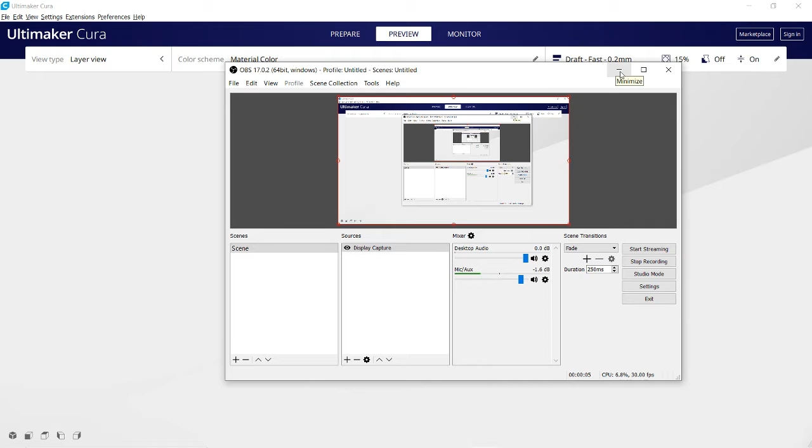So here I am, I've got Cura open. This is the most current version, you guys can get it installed. You've got to set up your printer when you install it. We need to configure it to the printers we're working with, and I'd like to do that on Friday's class so we can get the specs of the printer set up and match them to the printers we're working with. So let's save that for now, but let's start getting the actual print ready to go.

At this point, what I'm going to do is import the model I was working with. So I'll go File, New Project, then Open, and here we are. This is the truck hanger that we created, and I'm going to select it. This is coming from Maya. I go Open, and there it is.

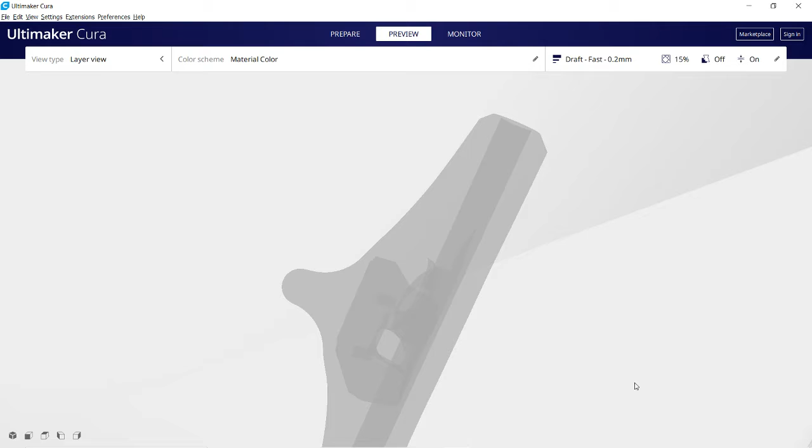I'm just using the middle mouse wheel. This is the workspace. Middle mouse wheeling, and I'm just rolling backwards, and as I roll backwards, I zoom out. Then I can use the right mouse button, clicking and dragging to orbit. So I was underneath it before. Here we are, there's the truck.

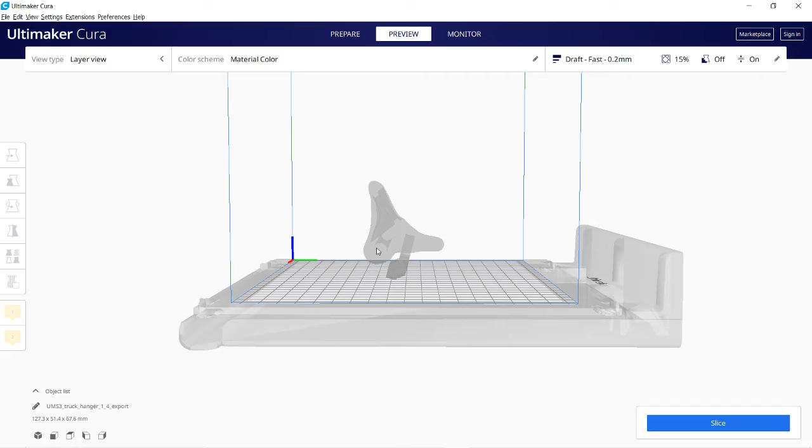Unfortunately, this is probably poor placement for the truck as is, because it's going to have to create a build from the support material going down to here, since it could never withstand this overhang. So we would want to reorient this. That's something we think about.

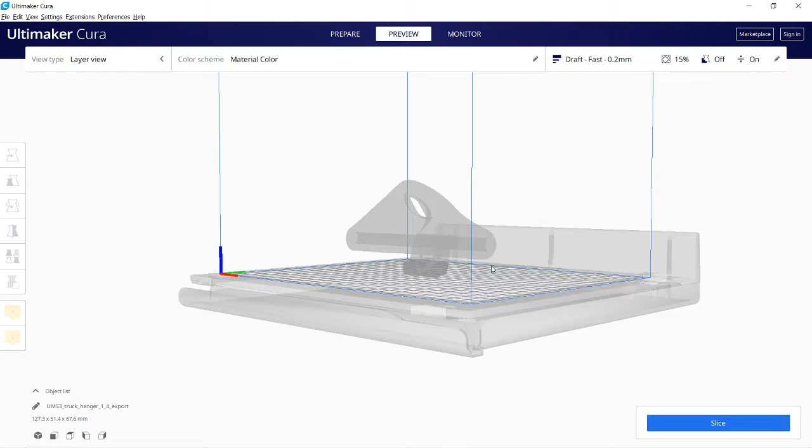And then the next thing, as I mentioned before, is which side needs to be pretty, which side is going to be facing our audience. I know this side is, but this is going to be a prototype, so this is not the final build. I'm going to do this at low resolution, and I think it's okay if this side has the support against it. I'll have to take a knife or a rasp, a little file, and clean this off, sort of like with an X-Acto knife.

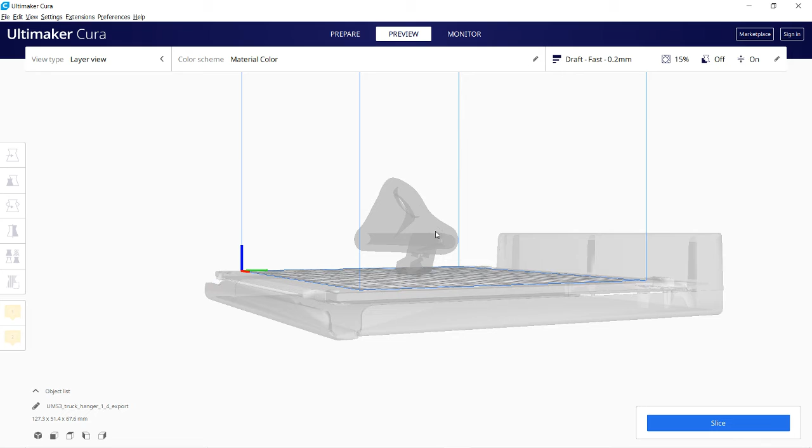Okay, so the first thing I'm going to do is reorient it. So we've opened this up, we're in the preview mode. I can click on Prepare. It works very much like the other programs we worked with.

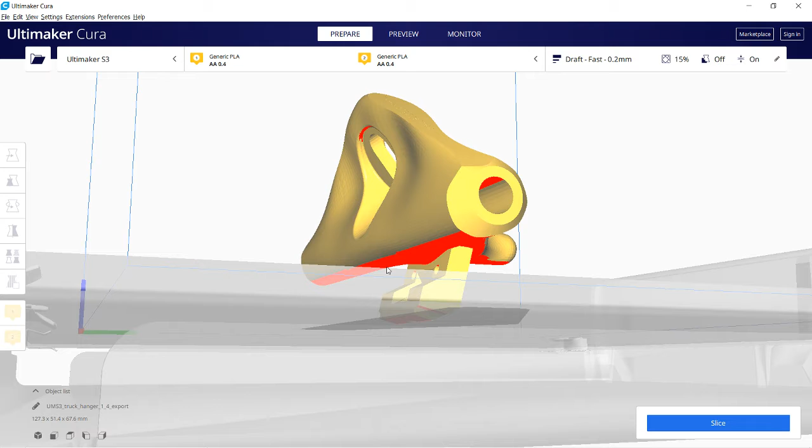What I need to do is have this selected. You can see I have all these little tools across the sidebar, but they're grayed out right now because I have nothing selected. When we get in here, though, we do see the red showing us the overhangs, that this is overhanging straight down to the ground and will need support. It could be supported, so we can choose whether or not to, but this stuff would definitely have to be.

So what I'm going to do is select it. I'm using the right mouse to move around. I'm going to left click directly on it, and as you see, the rotation handles come up. We can see if I go from the top, they have the move, which is T. They have a different hotkey system. This is S, and then this is R.

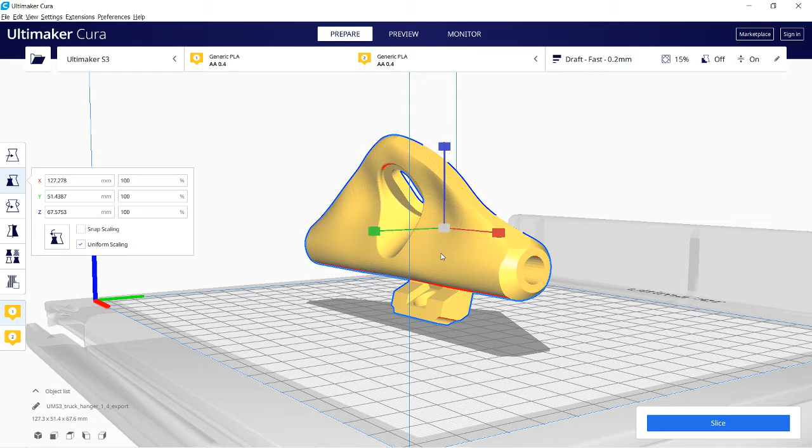T, S, R - T to move, S to scale. We don't want to scale this because I want to keep real world scale - it has to match up to my camera. And then here, this is going to be the rotation. So what I'm going to do is select rotation. I've got this here, and again, don't use the scale if you want to stay in real world.

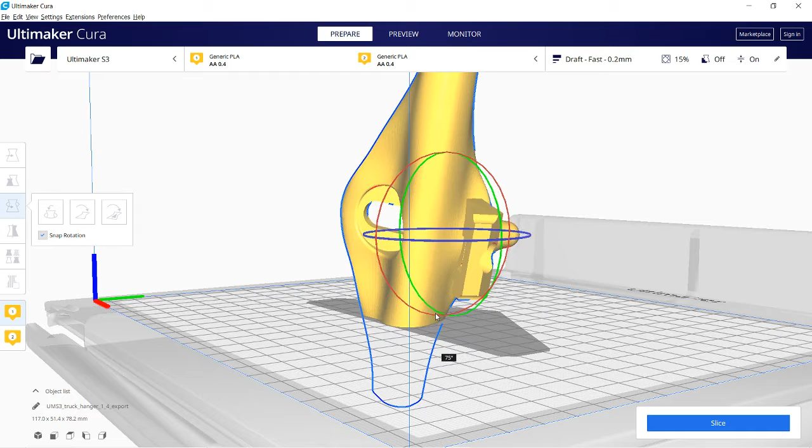And I'm dragging it, and you can see I'm totally failing, it's not working. And you can see as I'm moving, the red area showing the overhang is changing in real time. So what I'm going to do is just go Control Z to undo my move.

And what I can do is come over here, and we can see across the bottom we have these little view cubes. The first one is going to be an orthographic view in the front view. The second one is a top view. This should be a side view, and then the other side, so right and left.

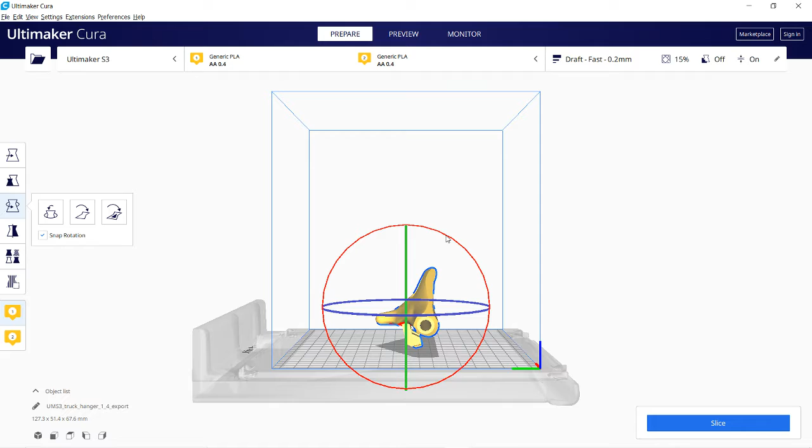I'm going to go into the front view, and I'll go into a side view like this. Here's our side view. I'm going to grab the red handles—I want to grab the handle, not from the center of rotation. I'm going to drag it like this, and try to get it into the position where it has the least amount of overhang, which I know to be this.

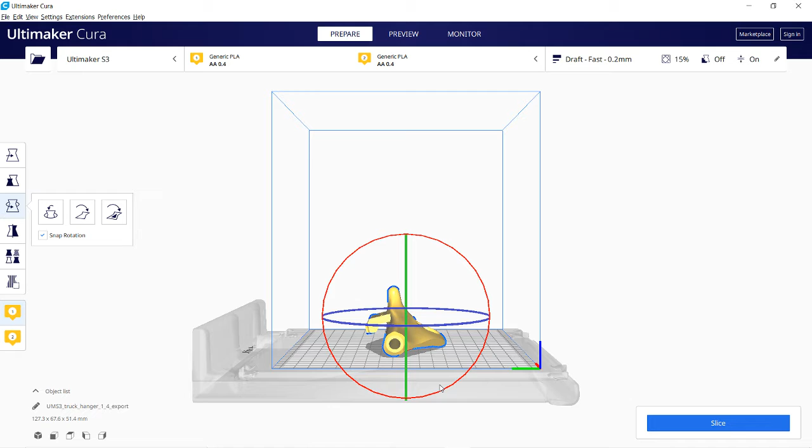The thing I like about this program is that it auto-configures it. It's automatically bringing it to the build plate so it's not going through the build plate, although I think I got it to go through once, and it was showing a failure.

With this done, I could just mouse around—this is something I would do in any 3D graphics program. Always rotate and look at it in the round, take a look. I'm going to zoom in here a little bit. Middle mouse click to pan, so I'm clicking and holding. I'm going to rotate around a little bit, zoom in, move around like this. This looks pretty good.

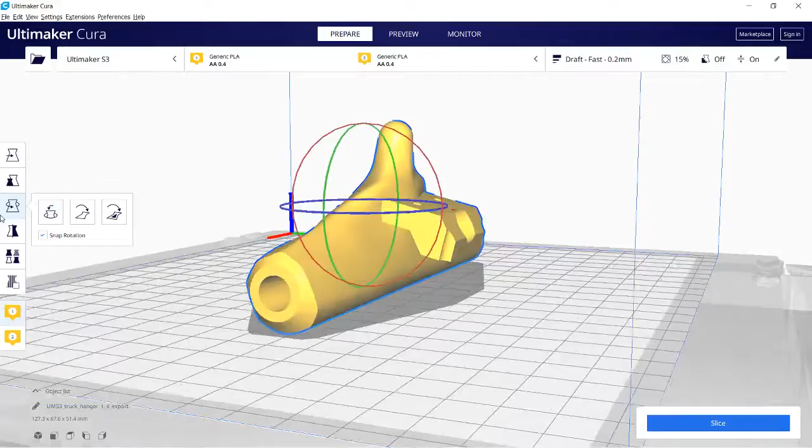At this point, what we're going to do is get the support set up and configure the build. For basic people, if you haven't done this before, the easiest way is to go with the basic settings, which are pre-configured here.

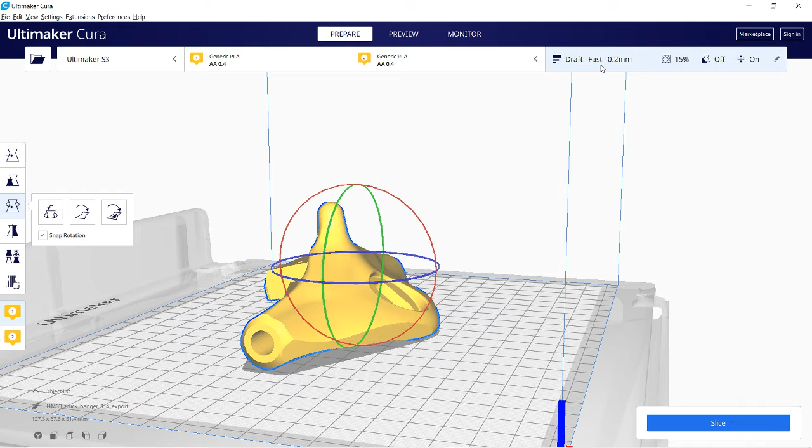You need to have your printer set up correctly—this would include material type, heat, speed, etc. That would have to be configured correctly. But aside from that, the basic actual construction of the object, how it's constructing the lines, the infill, etc.—these are the default settings right now.

So I can come over here and open it up by simply clicking across—this is just one bar, it doesn't seem to have individual clicks. I click once into the bar, it opens this window, and we can see I've already configured one of the profiles here, but we can go over to this one which is blank, so we could go to sort of what you'd be seeing by default. I'm going to switch to this here, and this one should not have my updates. Okay, so this should look like yours.

At this point, let's go through it. The way I would kind of do it, before I start playing with these settings, let's slice it so we can actually see what we're looking at, and then we can start to modify.

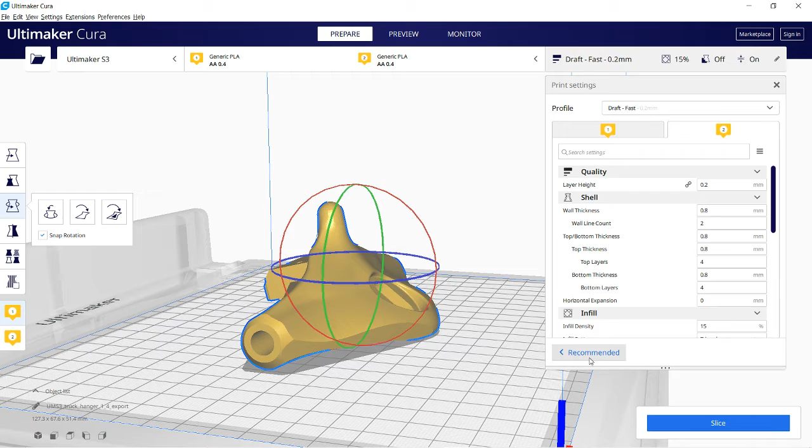So what I can do is go with the default settings, which is right here, over in recommended. By default, this is the thickness of the build, and this is going to really determine the resolution I'm getting. This is one of the most important settings—it's how fine and beautiful it's basically going to look, how close together the lines are, which is making this up.

So the 0.06 is going to be super high res—it's the highest res this printer is going to do. This is supposed to be sort of standard, this is getting prototypey, and then this is real prototypey. I'm going to go with this because I want to save material and make a fast build. As this number goes up and down, your build time is going to have a dramatic impact on build time.

Next, visual—this does not have to be perfect. Engineering is going to be something, because I've got these settings set, you can actually go back and forth between these. I'm going to push it up to 0.2 because I know that's low res.

Engineering is for mechanical parts—think if these are like something with teeth, mechanical gears, any kind of parts which work together, where the junction of those two objects is really important so they work in sync. This is when we'd turn engineering on, and it gives a finer quality to the edge of the build, so you get a better circular form here.

So I don't need this, but again we can turn this to draft—this is basically fairly similar here. I'm going to leave it at 0.2 because this is pretty low, but draft would also work.

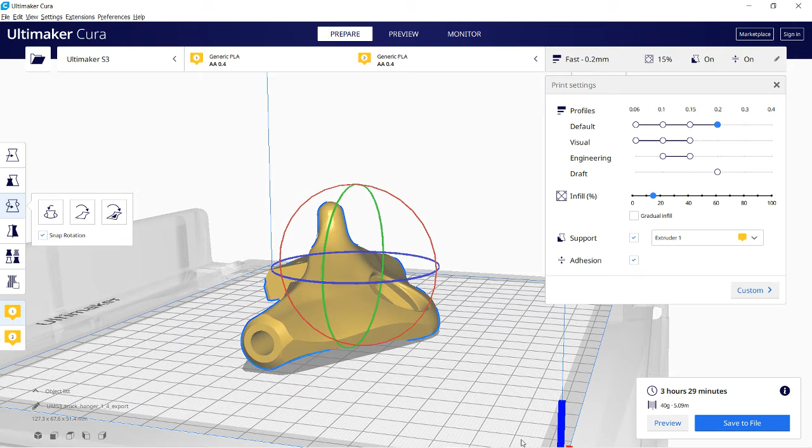Wait for it - this is actually pretty quick. Now I can hit preview. Hit the preview button, and there we go. I middle mouse click, or left mouse, right mouse click, and I move around, and we can see there is the build. If you come underneath it, you can see here's the support.

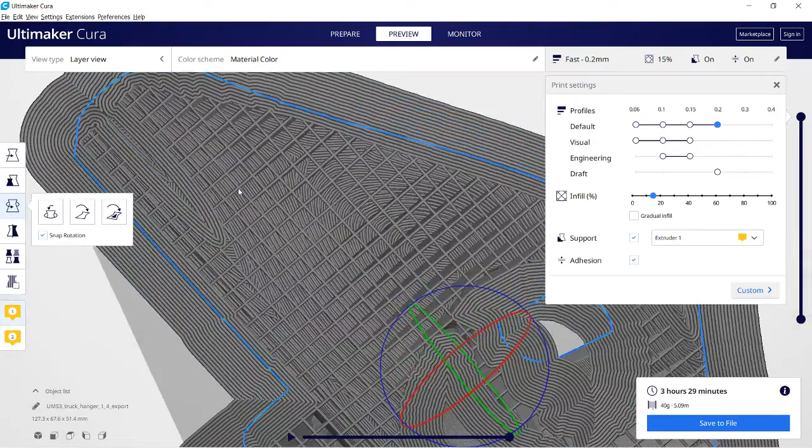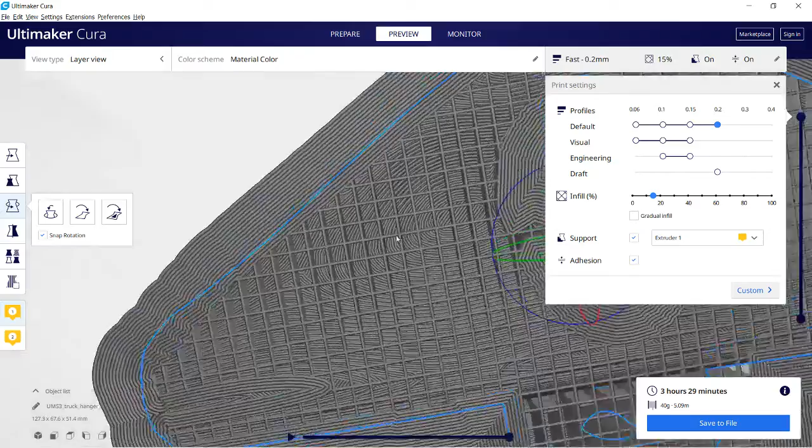It looks incredibly overbuilt to me. You can see this lattice work here, which is going down to the actual object, and it's getting in the way - it's too dense. What I need to do here is bring down this structure. It depends how heavy it is, and you'd be considering the weight that's going down, but again, this looks overbuilt.

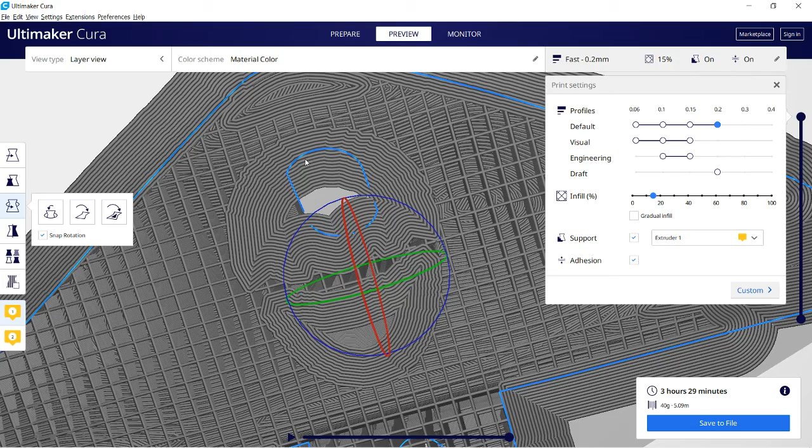What we see here is this inner wall is going to be the brim - this is going to be kind of like a little platform on which it rests, and this connects directly to things making contact with the actual surface plate. Then you have this outer wall here, which is going to be the skirt. What I've read is this is to warm up the extruder - it does a few test rounds, gets the material moving through it at the right temperature and consistency, and then it starts to go after your build. Also another way of tying it to the plate.

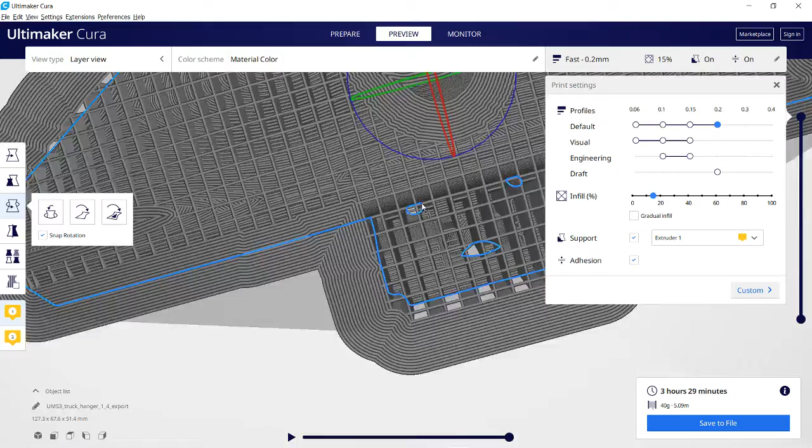So let's go through these settings. I'm going to back up here a little bit so we can see a little more clearly, like this. And I'm going to go from these settings here with the object still selected, and go to custom. As I go to custom, I'm going to go under number 2. We see the shell, we see the wall thickness.

The overall thickness right now is going to be 0.8 millimeters - this is the thickness of the overall wall. You have top, bottom wall thickness - this is the overall thickness of the combined top and bottom wall.

So the idea with the top layers and bottom layers thickness - you can see there are multiple settings for each, the top layers thickness and bottom layers thickness - would be like if you were doing something like making a building. If I was making a skyscraper, the bottom floors of that building need to be able to bear the weight of every floor on top of it, and they are built to be more structurally sound to carry that weight.

So the floors at the bottom of a building are going to be stronger, they're going to be overbuilt. That's what we're looking at here to sort of simplify this concept. Right now, if we're looking at it, basically the walls are even. So the bottom walls have a value of 4 and the top walls have a value of 4, so the thickness going from top to bottom would be even. You have one even thickness across this.

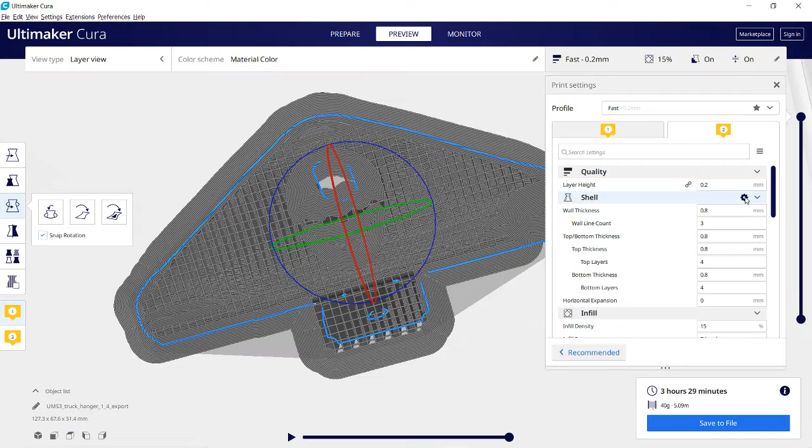So I'm coming through here, top layers. Again, if any of these values are not showing for you, I come across here to this little wheel, and I don't think they were showing for me by default. And then I come in here, it opens up this window with settings and visibility. So again, shell, mouse across, and if we click, it's already open. If I close it, the wheel would come back up again. I click on the wheel and this opens.

It shows me the shell, and because we're working on the shell, there's a lot of stuff we can add to the shell. We don't have time to go through everything here. The most relevant stuff is currently visible right now. This top and bottom wall stuff you might not even turn on. Most people would probably want the wall to be one even consistency across. But again, it's an advanced feature, and we could really tweak this if we went through some of the finer details here.

Right here, it's saying this overall wall, you've got a count of 3 on it. So you're looking at 3 different layers. Let me see, horizontal expansion. What is this? This is a feature I think most people probably wouldn't even turn on. What this would do is if there's a hole in your polygons that's not supposed to be there in the build, if you turn the horizontal expansion up, the value of 1 comes up, it'll start to fill that hole. If you turn that value down, it's going to make that hole more pronounced.

So if you want to see the hole, turn the value down. If you want to remove the hole, turn the value up. Again, this is kind of a weird one that I wouldn't even use on my models. Your models should be perfect. In this class, we're supposed to be making solid models. We shouldn't have this issue.

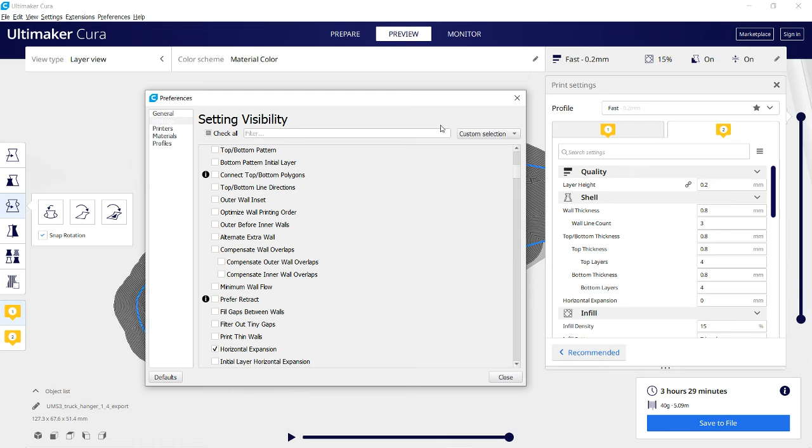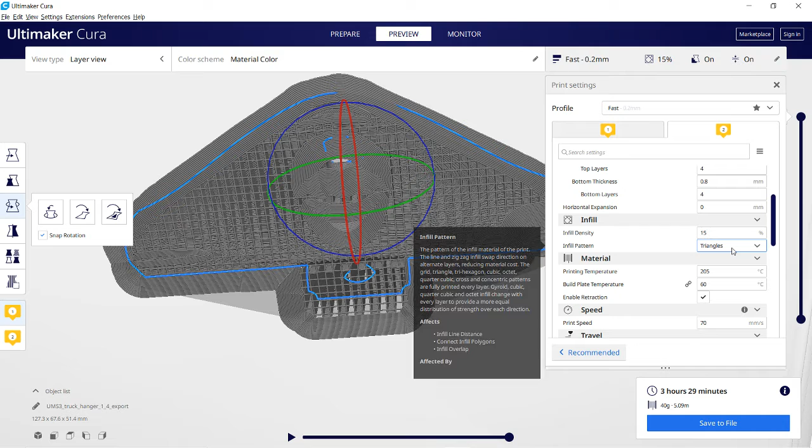We keep coming here. So this is the shell, and we can play with it. We can see it update as we change these values here. We have to kind of get inside. Right now, what would be visible and easy to see is going to be the support material here. So let's go down here. The infill. This is going to be what's taking place inside of it. Right now, it's set to triangles. We could set it to a grid-like pattern. This is the infill, which is taking place inside of the actual model.

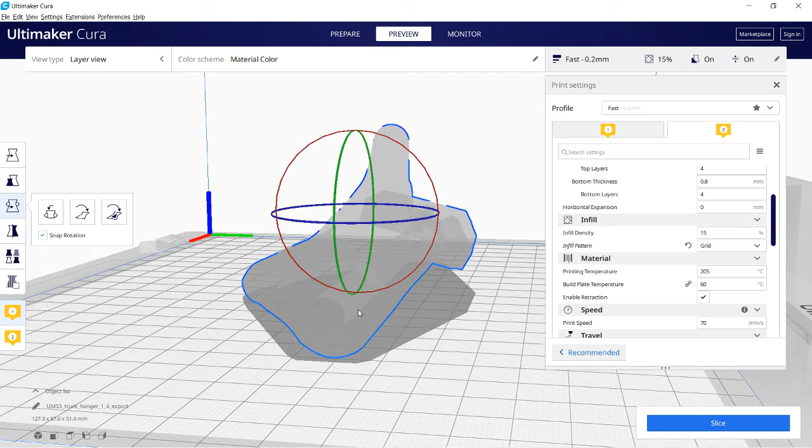So if I wanted this model to withstand a blow, if this is a physical object being used almost like a hammer, taking extreme impact, basically being thrown into rocks over and over again, to withstand that you would want the structural pattern to work with this. So for mine, just as a prototype, 15 is going to be fine, but it could get pretty dense if we were to take this up. So we can go into this more later on.

Material. Okay, here we need to think about what's going on with the printer. The printing temperature should really be in sync with the material that we're working with. So you need to read about the material that you're working with and make this work. This is super important to get this right. Build plate temperature 60 is what I'm reading is supposed to be good.

What you need to think about is how the material is cooling as the material is going from this molten-like state to a solid. As it's cooling, things warp. As it cools too quickly, you can see it sort of buckle. It will start to create a U-like shape. It will start to fold upwards because one side is cooling more quickly than the other side. And when you see that U shape, usually what's happening is the top, the surface, is cooling, and the bottom, which is on the build plate, is still too warm.

And what's happening is, as the top is cooling, as you guys know, it's shrinking, and it's pulling in on the edge, and it creates like a taco-like effect. And you see this in lots of different materials, wood, others, and that's what's happening. One side is cooling too quickly, and the other side is not. So what you want to do is get this temperature right, so it keeps it at a nice, even temperature when it cools. Again, this would be related to the material that you're working with. But these default settings for PLA should be pretty good. This should have good results. You could even possibly turn this down a little bit.

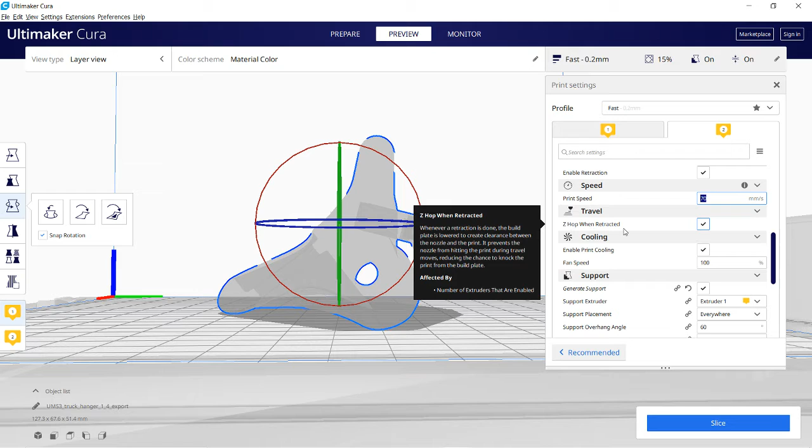Z-hop when retracted. So basically what happens is as this is printing, if the print head moves over an area and it's traveling to another area where it needs to start printing again, it's going to lower the build plate and safely lift the print head up and move it over so that it doesn't catch the object here. So that if it's moving from one area to another, it doesn't just drag straight across and accidentally hit something that it's already built. It's telling it to be conscious of the z-axis as it's moving that print head across to get to another location to start building again. So you would definitely want this turned on. This would be a yes.

Enable print cooling. So basically, it goes back to what I said before about the speed at which it's drying. These guys have it worked out. They've been printing lots of stuff, and they know the speed at which these plastic materials need to cool, and they have a fan which is synced to that equation, essentially how fast does that material need to cool. So you definitely want the print fan on. Again, this could be related to the material, so it's something to look into, but by default I would have that fan turned on.

It needs to cool. If it doesn't start cooling, it remains in that sort of liquid-like consistency, and it can slump. It would be like if you've ever worked with clay. That would be a great example. The clay, if you start to try to build too high, is going to fall over. If you're building a thin wall, it's almost impossible. So it needs to dry at the base as you keep working your way up. Again, read about the materials.

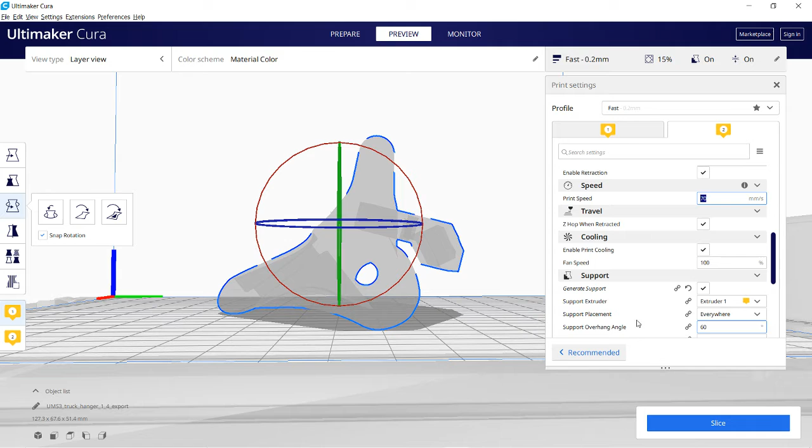Come over here. Support. Generate support, absolutely. Extruder 1. Support placement everywhere. Or it could be touching build plate, so that would be just at points of contact. This will be much more conservative. Otherwise, it's basically coming straight down all the way across, and that's going to be kind of heavy. And I think that's what we were looking at the first time. It looked kind of overbuilt everywhere.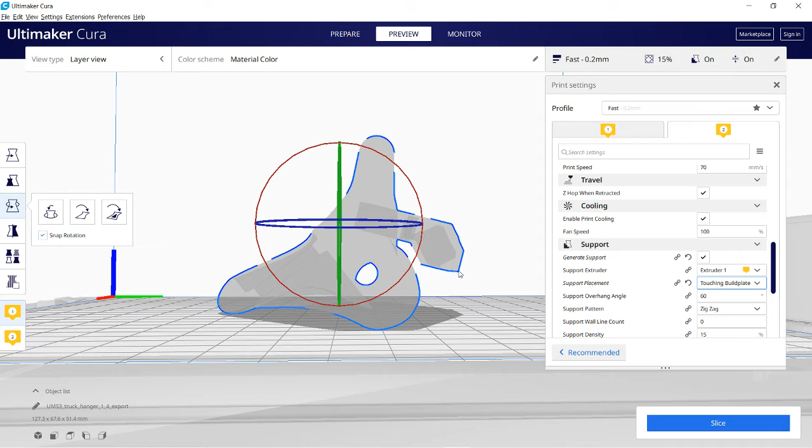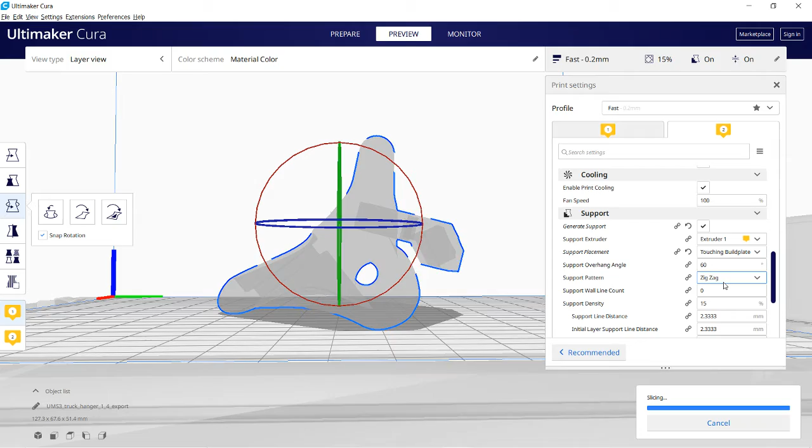Angle support. So this is going to be the angle at which it's going to take an overhang to count for build support. 60 should be the default. Support pattern is zigzag. So we can see at the bottom, this should be in a zigzag configuration. Let's actually slice this real quick while we're waiting here. So I'm slicing it. We can take a look at what we're going to see. I bring it over here. Bring it in. And what do we have here? Support pattern is zigzag, which doesn't look super zigzag.

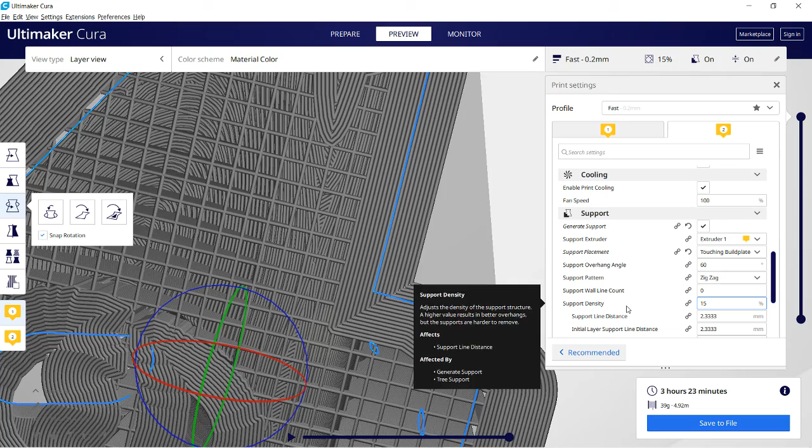Line count, 0, support density. Okay, so here's where this is one of the more important ones. Some of these start to become a little bit more meticulous. This one's a main one. On the support density, let's take a look here. It's set to 15 right now.

What I can do is, it doesn't like me going that way. I'm going to turn the support density down to, let's make it 5. And then I'm going to slice it. And you can see that the grid is opened up significantly. I'm saving tons of material on the support, and my cleanup time has just been dramatically reduced.

All I have to do is clean up these lines instead of the number, which was basically doubled. It was like double the amount of work, and it's going to look that much better. Does it need this much support? Don't know. I think this would be about right for the light build that I'm going for. You could push these numbers up.

Keep in mind that some of these values here are counteracting these values, so I can start to push these back and forth, and it's going to start moving the grid around. This one's the one that you guys should be most concerned with. We'll do an advanced tutorial where you can really start to have a major effect on the overall grid. With this, it can get extremely custom. The biggest one, though, here is going to have the most effect.

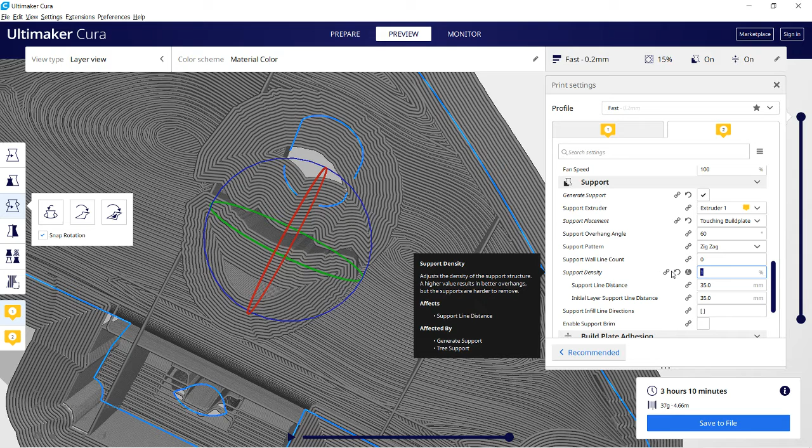So let's turn it down to 1, and you can see. Slice it again. You can see way out there, giant grid at this point. So probably this will not work. This is not going to be enough support for the object. So we could turn it back up to maybe like 7. Let's see how that works.

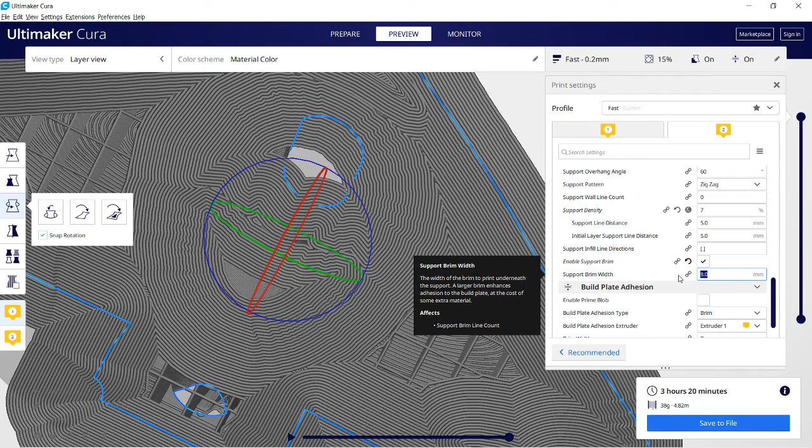Okay, so I'm going to turn on the brim here, and you already had the brim sort of built. And you're going to see this inner wall is currently set to 8 right now. So let's slice and just take a look. So looks like it's more than 8 to me, but it's being multiplied on the other one. I could turn it down to 1 and watch the inner wall.

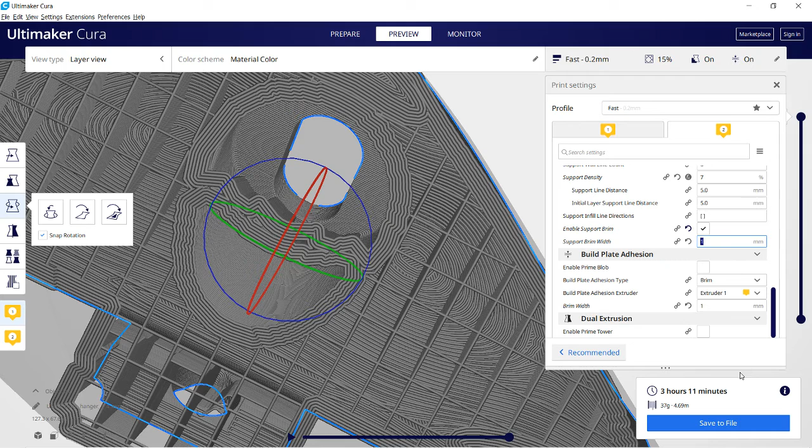This is going to be a little light, so I'm going to bring this up a little bit. Let's make this about maybe 7-ish. Let's slice. I could turn this down just a little bit. I'm going to keep going though in the interest of time. Next, we went through here, brim support, etc.

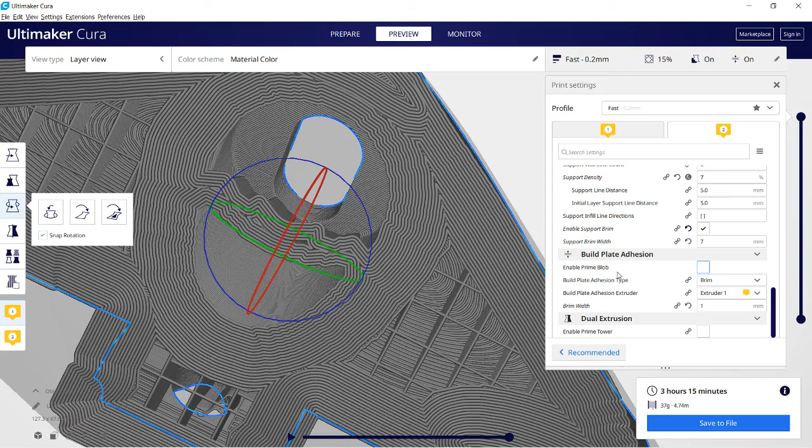What else do we have? We've got here the enable blob. So basically this is another custom one that you might not necessarily have to have, but what it's going to do is create a little blob of material to warm up the extruder, so it will actually start to print a little chunk of mass. And the idea is to get the material moving through the print head at the right speed and temperature before it starts building this.

If it's going through too cold, one of the terms would be it's going to sort of spit. It won't lay a consistent line. It'll lay a little piece, and then it'll move along, and then it gets enough built up, and then it spits out the next one, and it'll be like little dots as it goes along the line. The vice versa of that is if it's too hot, it's basically going to be laying yogurt down. It'll have no real mass or consistency to it.

It'll be just sort of like mush. And the idea is, as these lines of mush line up, they'll start to just sort of smush over and turn into just like a blob. The whole thing will sort of implode on itself if it was too hot. So we need to get the temperature just at that right spot where it's gonna hit and land right.

Okay, so we come over here, build plate adhesion. So this is the idea of using the brim to tie this down to the actual build plate. So we want to anchor the object here. So we're kind of doing it here with this build plate adhesion. Dual extrusion, prime tower. Again, custom one where I could turn this on, and it's going to basically heat up those dual extruders to get them ready to work with the build.

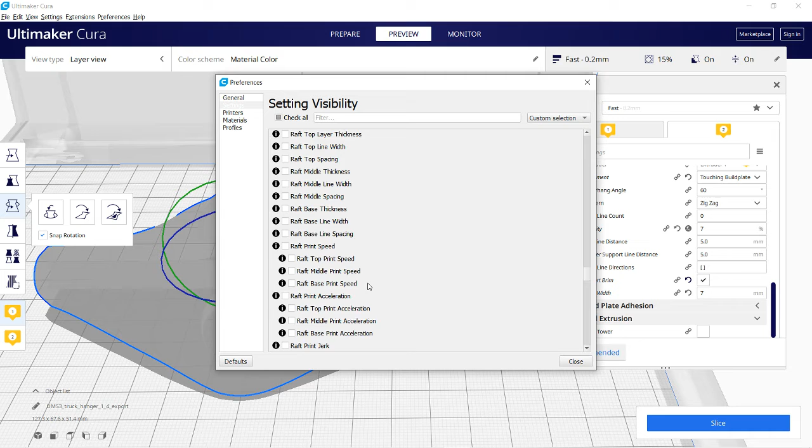I'm looking over here. Is there anything else here? Yeah, sure as possible. We could build a skirt, and I don't see the options currently open. So what I'll do is I'll come over here, build plate adhesion. Let's come into this option. Build plate. I'm gonna hit the little option here. It's a raft. Where's the skirt? It's gonna be up the model. There it is. Skirt. I'm gonna turn skirt on. Brim, skirt.

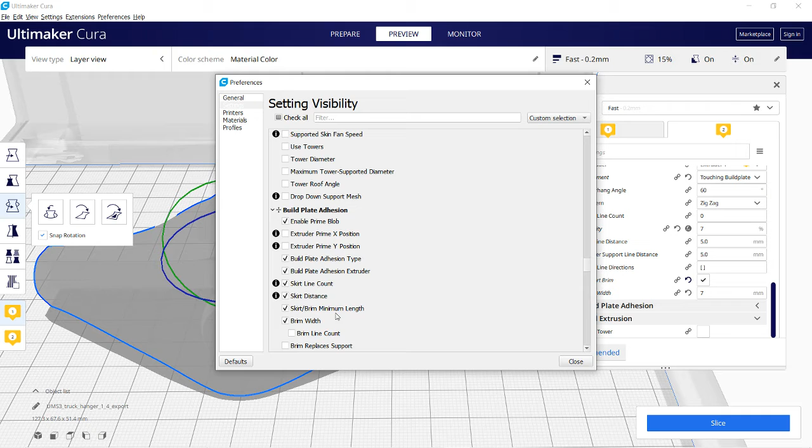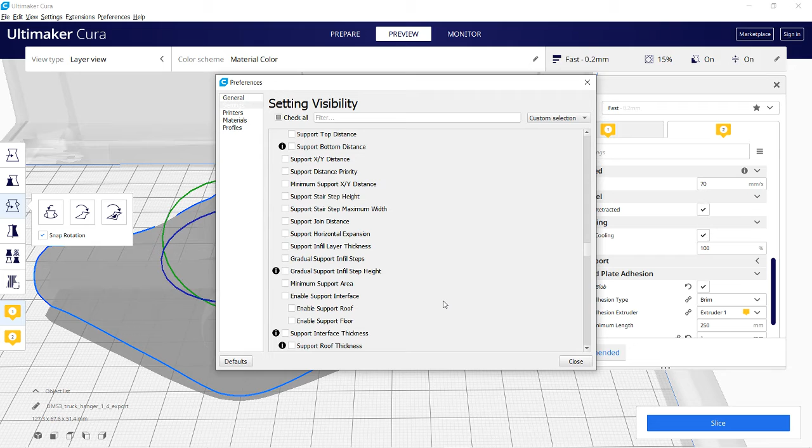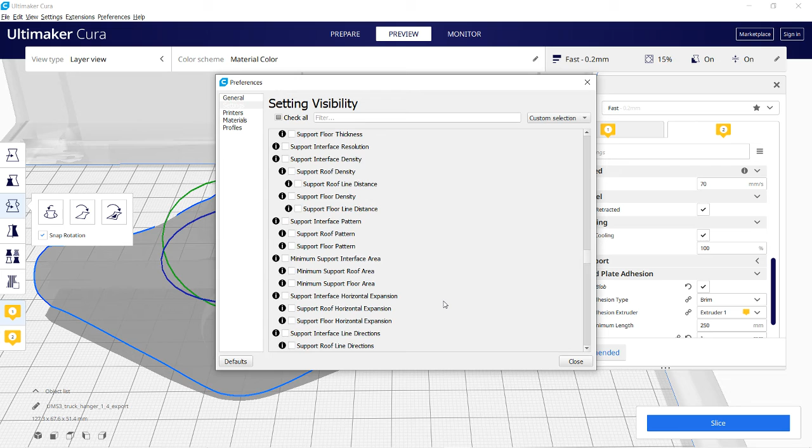So this is under the build plate adhesion. Should be. Close build plate adhesion. There it is. Skirt brim length. I want one other one here. I don't see it right now. I had it before. Well, it is what it is. We'll get it. I'll come back to it in a little bit.

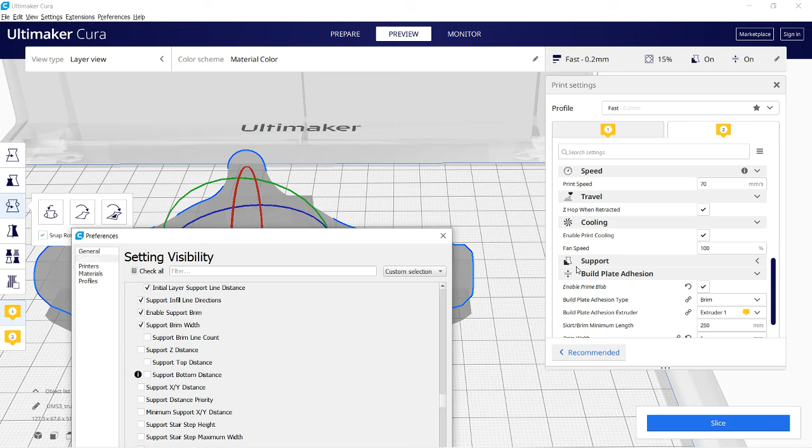But basically, yeah, the skirt is going to be the outside one. It's the value which goes around the outside. And we can also bring that up and down, just not exactly right now. Alright, so we keep going. Support, I think we basically covered most of it, like the relevant stuff. You've got control over the thickness. Extruder.

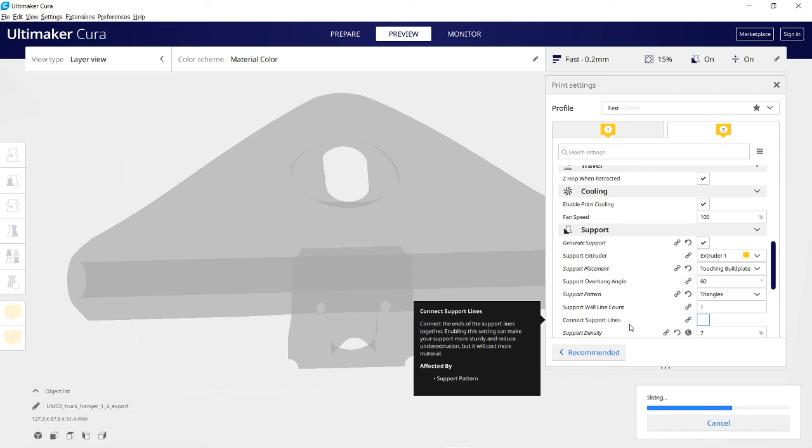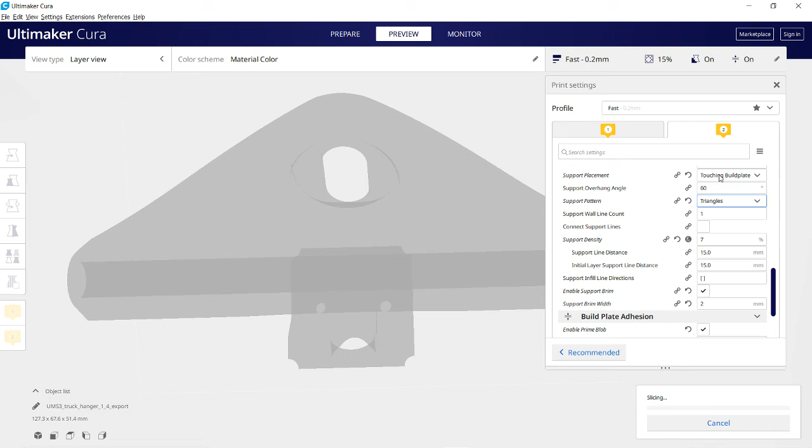Let me do this. Just turn it to triangles, and I'll come over here and let's slice it. And there you go. It's turned this from the squares to the triangles. I can bring the brim size down so you can see it a little more clearly. I'll turn it down to like 2. But you can configure this by just basically working these values to your own liking. Now we can see it a little more clearly.

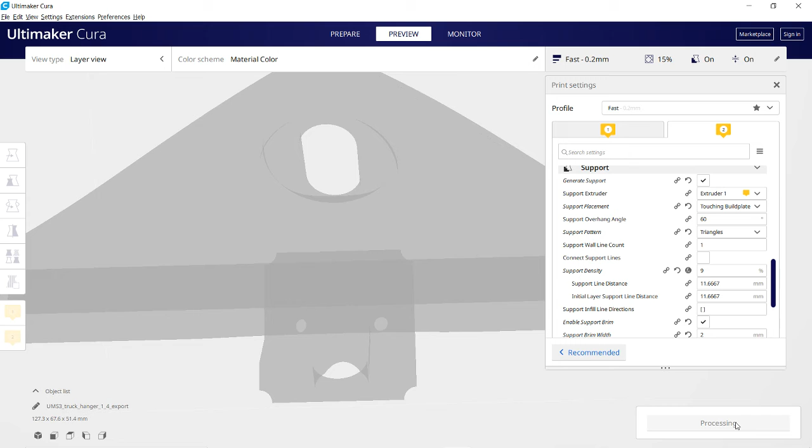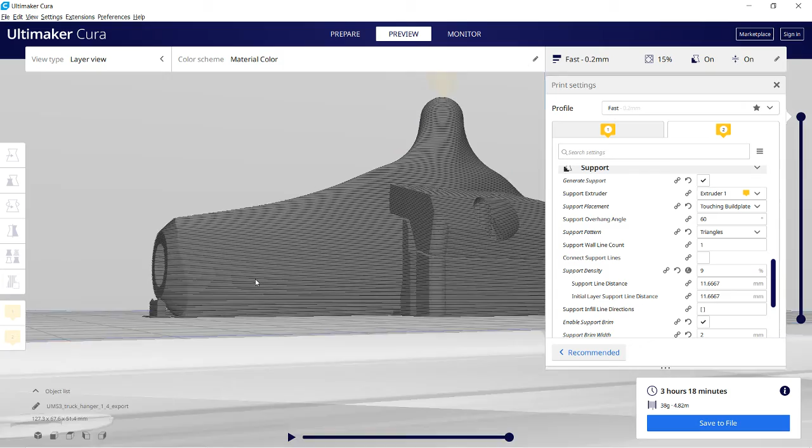And then I could go into the density. And I'd probably bring the density in a little bit on this. So the main density is 7. Let's make it more like an 8, 9. I think we're getting close. That looks pretty good to me. You could bring maybe the brim up just a little bit on this, but I think this is starting to look about right. And you're gonna figure it out once it goes. So then just give it the visual once over and just make sure everything looks right. I think it looks pretty good to me.

So at this point, if you feel like everything's okay, I can go save to file. So we've gone through, these are the basic settings. We'll do an advanced section on the advanced settings in this, dealing with the overall structure and the internals, and we can do even more advanced on the support. So to finish it off, I'm going to go save to file and just save it in the folder.

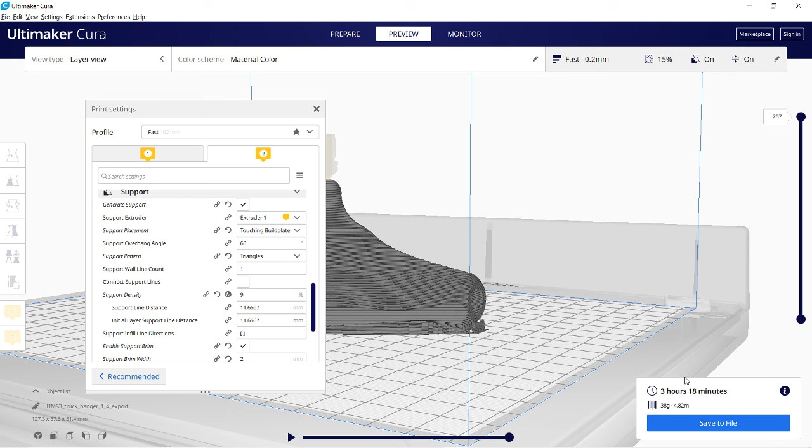This looks correct. And what I could do is we would save it to the USB card, which we would put into the Ultimaker, and then you'd be able to print. So let's go save. I don't have the USB card. And then basically this would be done. What I'd like to see for the homework would be, you don't have to have the finished print, but I'd like to see this right here. I'd like to see the build, and I'd like to see how you've got it set up.

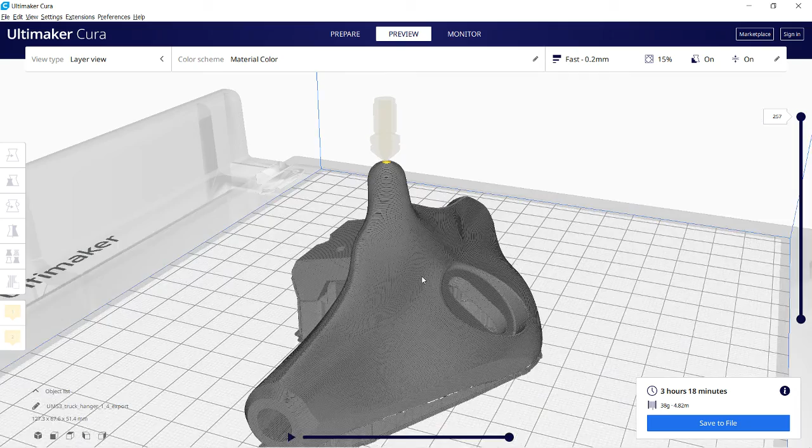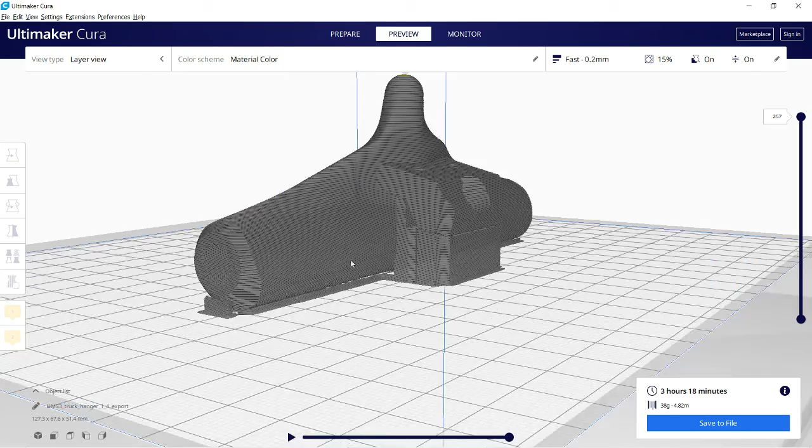You can use OBS Screen Recorder to do this with, and just like I'm doing right now, just start screen recording, show us what you've got, show us where the two objects are coming together. Here's the original hanger, here's my little camera attachment, and then here's the support structure underneath it. And then this would be enough. You could do screenshots as well, but a video would probably be best if you could do just a short little vision of what you've been working on. So awesome. Okay, that's it.